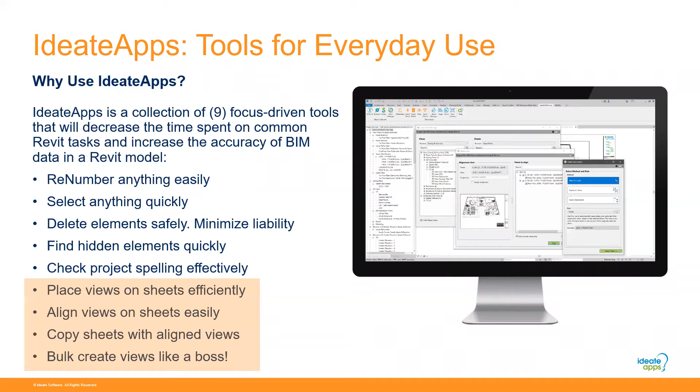So that's really what we're focusing on today, all the sheet and view tools of IdeateApps. As you see on the screen, IdeateApps has the renumber, smart delete, X-ray, and spell check, but it also contains the Ideate ViewCreator, Ideate SheetManager, Ideate Align, and Ideate Clone. I'm going to go through each one and show you the workflow that can really enhance your Revit productivity.

Ideate ViewCreator is the first tool I'm going to talk about today. ViewCreator allows you to create new views based on a series of rules. Those new views could be dependent views, as an example, and it's one of the first examples I'll show you. It could also be a new view based on a different scale, a different phase, or a different discipline. Really, with any particular view properties, you can set that up, and then you can have the rule actually help you name that new view.

So we're going to set up some new views first. Then I'm going to show you how Sheet Manager allows you to lay out those views on the sheets. You can drag and drop views from the left-hand side, where the views dialog is showing you, and then on the right-hand side is sheets. So you can just drag and drop. There's a lot of other tools where I can cut and paste and move viewports from one sheet to another very easily.

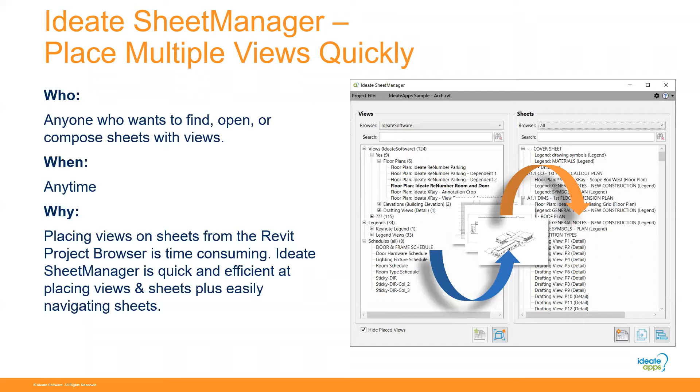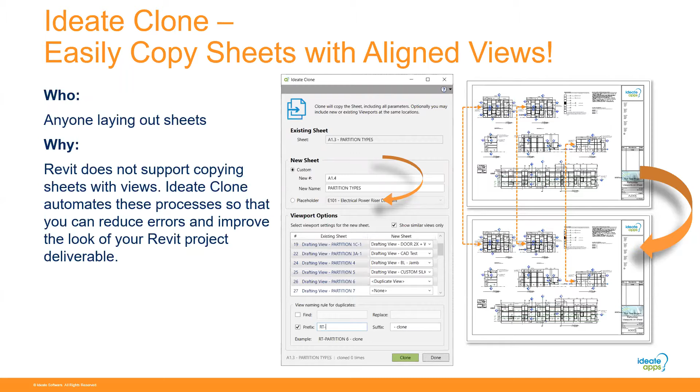Our Ideate Clone allows you to copy sheets because, as I mentioned, in Revit that's just not available. In fact, it's one of the top wish list items if you go to the Revit Ideas forum, to say, can I copy an existing sheet? Right now it's just not supported. So this gives you the tools to copy the sheet, the title block, any 2D information or annotation on that, but also be able to control the viewports. Do you want to copy the viewport, or would you like to swap one viewport, like one schedule to a different schedule? So we'll go through that example as well.

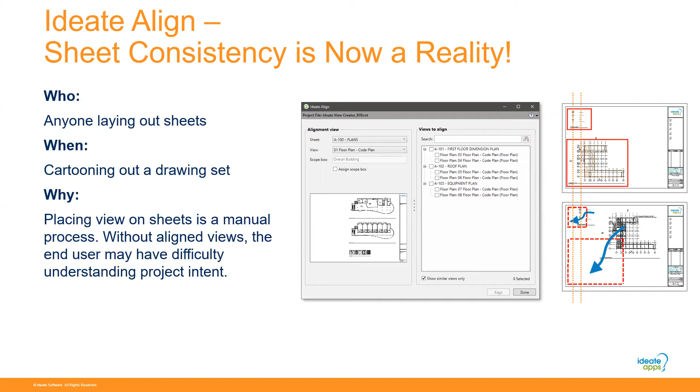And then our Ideate Align is about keeping those viewports aligned across multiple sheets, all automatically. So whether it's a schedule view or a plan view, you're going to be able to keep those things aligned. Well, I guess it wants me to go right to the demonstration.

So I got that set up. Let's switch over here. Today I am showing Revit 2021, because I thought that most people are probably using Revit 2020 or 2021 in their daily productivity or daily project work.

If you're not familiar with Ideate software, once you install any one of our applications, you'll see there'll be an Ideate software ribbon panel. I'm going to select Ideate software, and you'll see all the tools are available. Like I said, we developed four other applications, the Style Manager, Sticky, Explorer, and BIMLink. But here, starting with Renumber and all the way to the right, are the tools for IdeateApps.

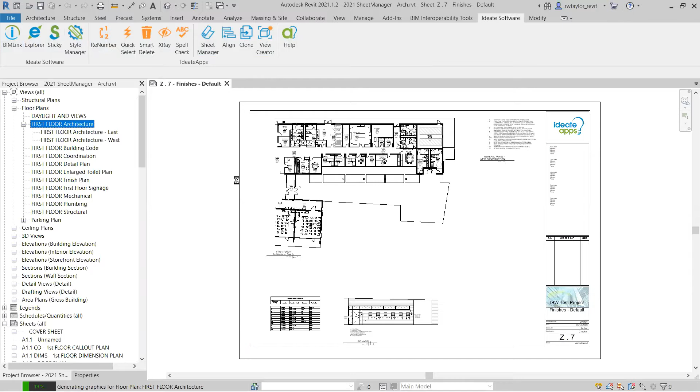As I mentioned, we're going to start with ViewCreator. You look over here to the project browser, right? I have a floor plan, first floor architecture. If I double click on that, you can see this is the overall plan, right? But what I've done is I've used crop regions basically, and I've selected an east view as well as a west view, and I've set that up. So those are dependent views underneath the main architecture floor plan.

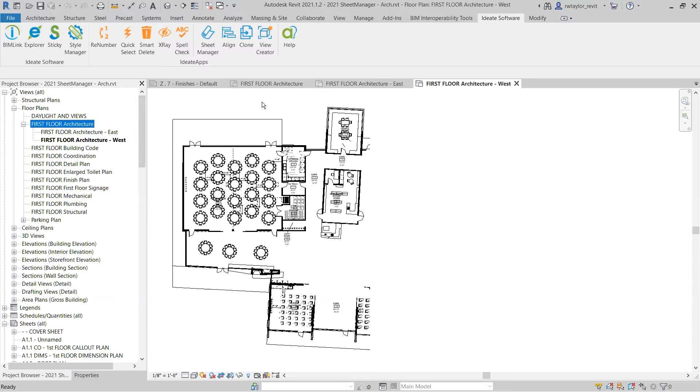What if I wanted to create those dependent views with the same crop regions and the same properties for other floor plans? Well, that's one of the uses where Ideate ViewCreator can come in. So I'm going to close these two, the east and the west view, and we're going to come over here now to ViewCreator. When ViewCreator starts up, it allows me to select different methods, right? I'm going to show you another one, the duplicate view method, in a moment. But right now we're going to apply dependents.

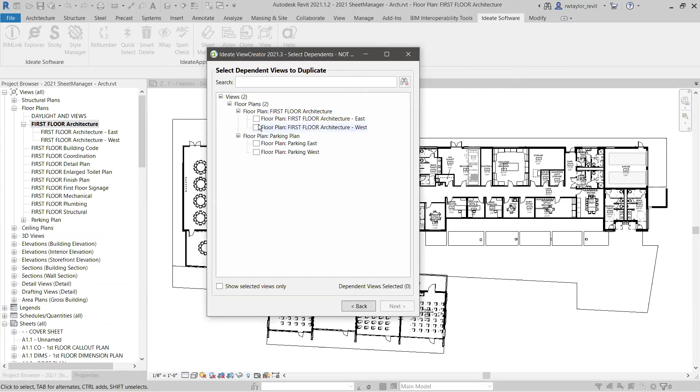So I'm going to select the views to start out with, right? In this case, I've got a parking plan that has some dependent views, but I've also got that first floor, east and west. So I'm going to select those two, the east and the west floor plan, and I'm going to say next. Then I would say, well, what do I want to apply that to, right? I would like to apply it, and I'm going to select architecture just to show you what that's going to do here, because I'm actually selecting the same plan.

I'd like it to be on the coordination plan, on first floor signage, mechanical, plumbing, and structural. So I'm choosing those that I want to have ViewCreator apply those dependent views. I'm going to say next.

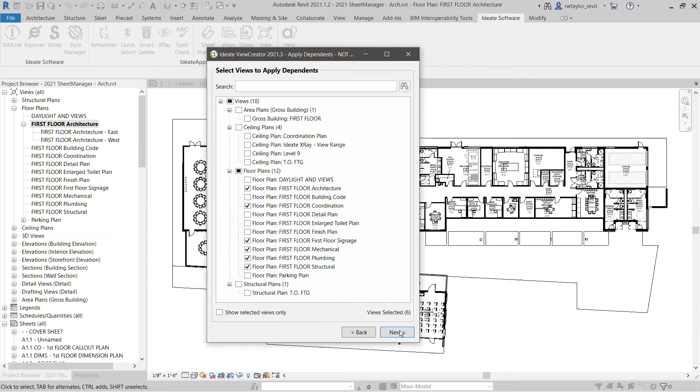Based on that rule, it's going to give me a preview of the view and the naming convention. And we're going to see that I get an error here in a moment. It says create 12 views, but I can't click on this until I solve this error.

The reason it's giving me this error is because I selected the first floor architecture and I'm trying to apply the same east and west, and it's already there. It's telling me these two are there, so it's either saying change the view name or do something else. But I can do a shift select on this, say delete, and now I have the ability to create those 10 views.

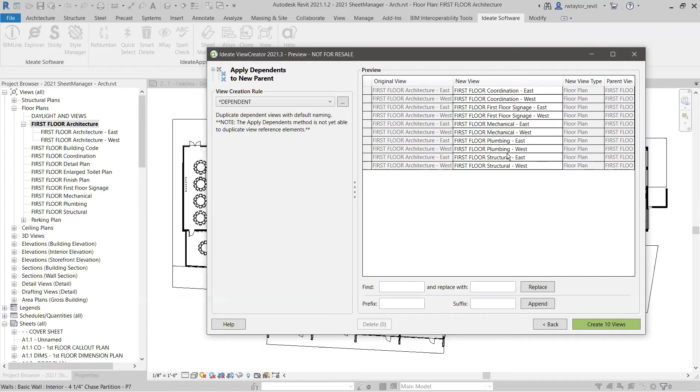If I expand this a little bit, I have the ability to change the view name here. I can type anything I want basically, but the rule allowed me to keep the same east-west dependent view selection. So I'm going to go ahead and create those 10 views.

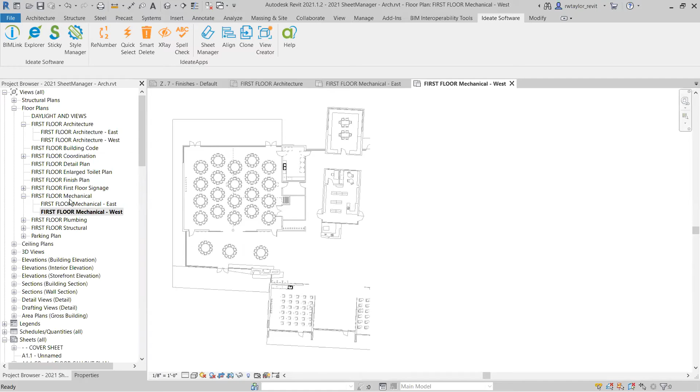And it says okay, you did it, you're done. Now over in the project browser, if I go to the mechanical, I have dependent views east and west. And it has the same crop regions, but we've applied the information based on the parent view, which was this mechanical. If I double click here, this is the mechanical plan.

So that was just one method of using ViewCreator. Now we want to come over here to our sheet manager. And I like to think of sheet manager as sort of the

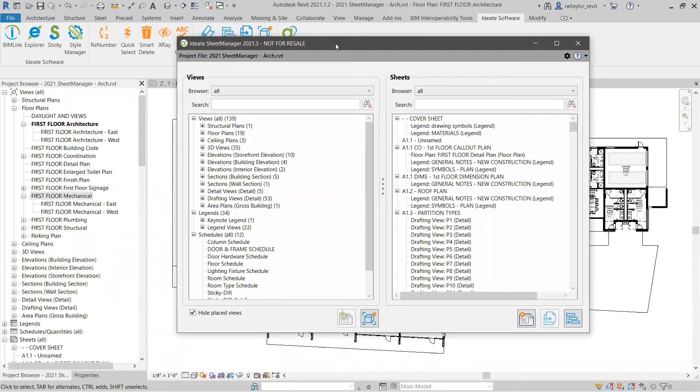centralized traffic cop, if you will, if there is such a thing anymore, where they're basically routing the information, routing the cars or trucks to the right individuals, or the right locations, I should say. And so the sheet manager allows me to access all the views, all the sheets, and allows me to create new views and drag and drop views on the sheet.

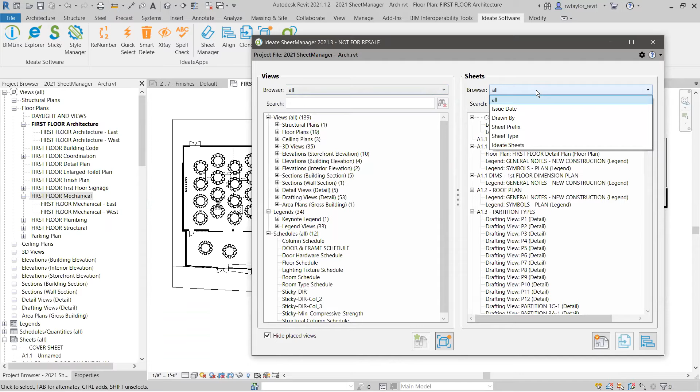You'll notice that right now I can look at the browser organization here. Anything that I've already set up, I can select, or I can just say all views. The same way with the sheets, I can look at the browser organization and just say, well, I want to look at all sheets as an example.

So in this case, let's create a new sheet. I'm just going to accept my defaults. And if I look at the bottom here, as it selects, my last sheet was in the Z's, so it just said okay, that's the next in the list.

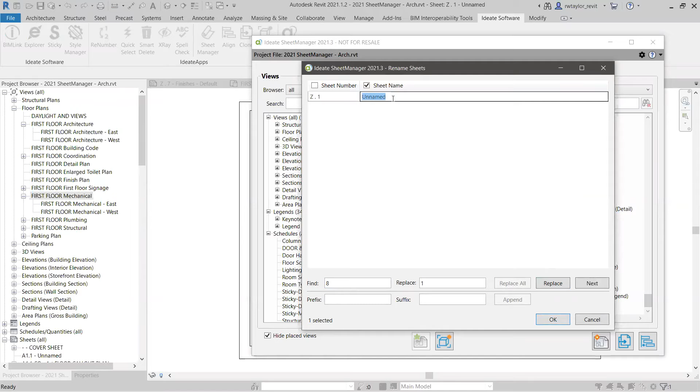But in fact, I want to right click and rename that. In this case it's a pretty simple situation, I just want to change it to maybe like Z.1, but I wanted to show you the tools here, as I can ask Sheet Manager to find 8 and replace it with 1, and replace. So now the sheet number is going to be called Z.1, and the name I'm going to call it coordination.

So the reason I did that was just so that we could see it here up in our list. Right now we have the sheet, and there are no views associated with it.

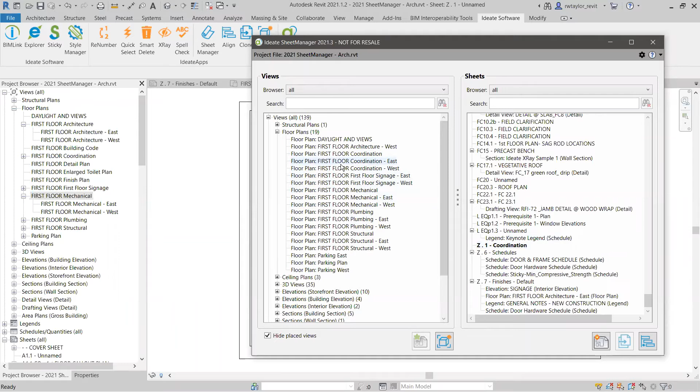So remember, we created with our ViewCreator, if I come over here to floor plans, we now have a number of new floor plans. One of those is the coordination east and west. So I'm going to select the coordination west, click and drag and drop it over to Z.1. That assigns the floor plan to that sheet which I called Z.1.

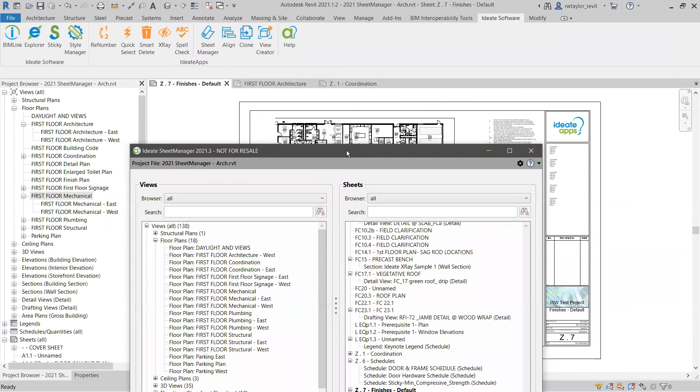Now if we look over here in the background, there's our finishes. Notice that if I zoom up on this, this is a signage elevation. And maybe I want that signage elevation, I want to remove it from Z.7 and bring it over to Z.1. So I'm just dragging and dropping. And because Revit only allows a view on one sheet, it automatically removes it from Z.7 finishes and puts it under Z.1.

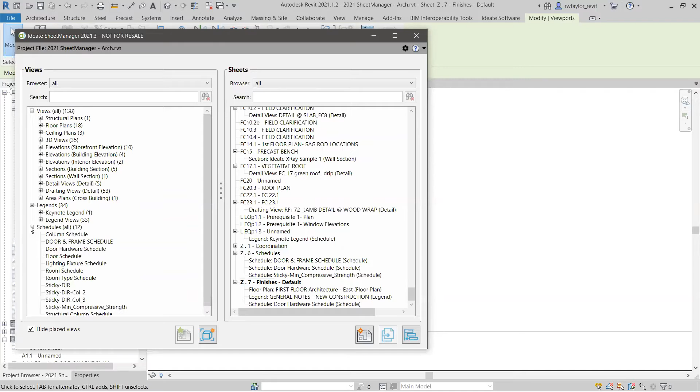Then I might want to place a schedule. So I'm going to come down here to schedules, and maybe say that I want a door hardware schedule also on that Z.1.

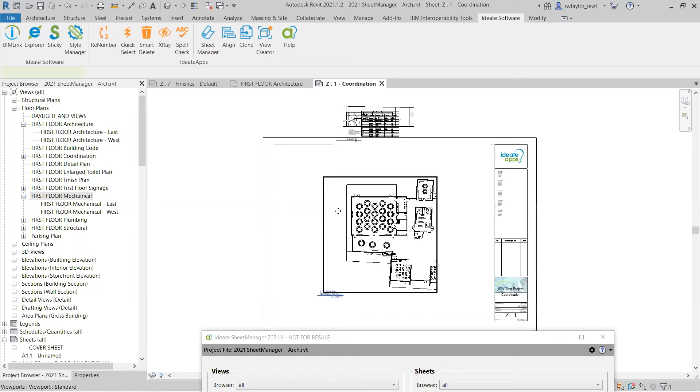If I expand that, you'll notice you can see the viewports assigned to that. Let's come back over here to Z.1 coordination, and then I can start to lay out those views where I want them. Because now that they've been assigned to the sheet, I can say I want the viewport in the upper left-hand corner, the schedule down in the lower right, and maybe this elevation in this location.

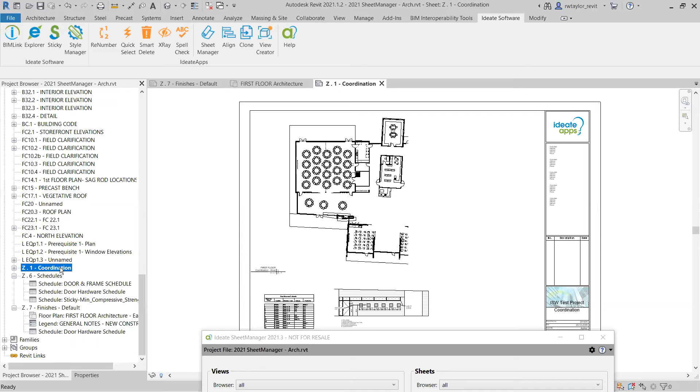So I basically laid out the plan, schedule, and elevation the way I want, and I would like to duplicate this. Over in the project browser, if we go to sheets, I go to coordination - this is what I'm on, and it shows me the active viewport. I'm going to right click and say duplicate, and it's all grayed out. Revit doesn't allow me to duplicate or copy a sheet, but we can do that now with our Ideate Clone.

So I can come over here to the coordination and select Clone. Here's where we're giving you the tools to control the viewports. It's going to be called Z.2, and it's going to be called structural, because I'm going to take this and make it the structural plan. So I'll say structural. And here is where I can swap the viewports.

Right now it's saying you've got first floor coordination west. Maybe I want first floor structural west. And then for the signage elevation, what I want is an overall building elevation, not an interior elevation. So I've got one created already - if I come down here, you can see I've got west elevation for structure.

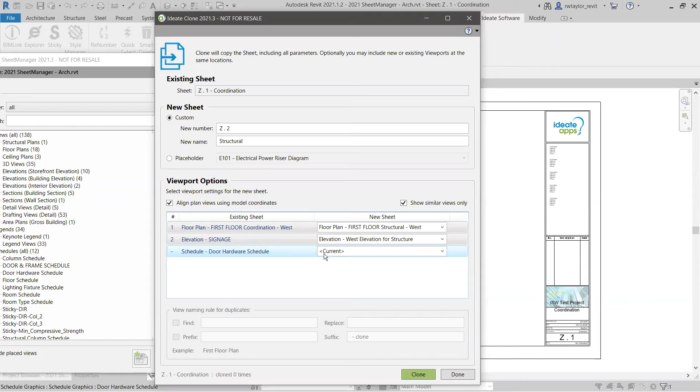A schedule can actually be on multiple sheets. So if I say current, it's just going to copy the door hardware schedule and display it on this sheet. But I'd like to swap that to a more structural type of schedule - I've got here this minimum compressive strength schedule. So if I'm duplicating views, I've got rules where I can duplicate the view and the name very easily, but in this case I just swapped all three viewports to these three new viewports.

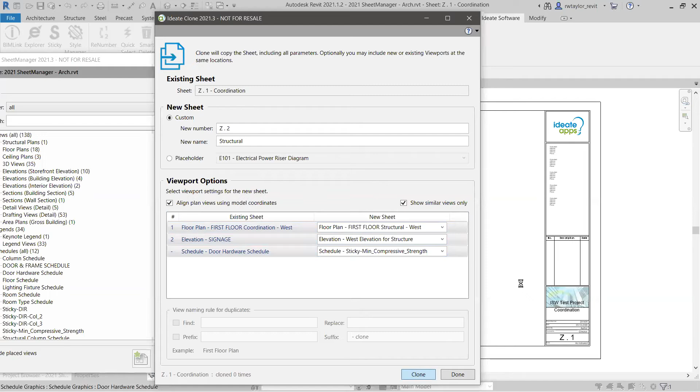Now when I hit clone, it's going to copy the sheet, the title block, and any 2D information on that sheet - in this particular case there really wasn't any 2D annotation. But it's going to keep everything aligned in the correct location. So now when I select done and look at this, here's our original Z.1 coordination, and here's our next one, Z.2 structural, and you'll see that the floor plans are aligned.

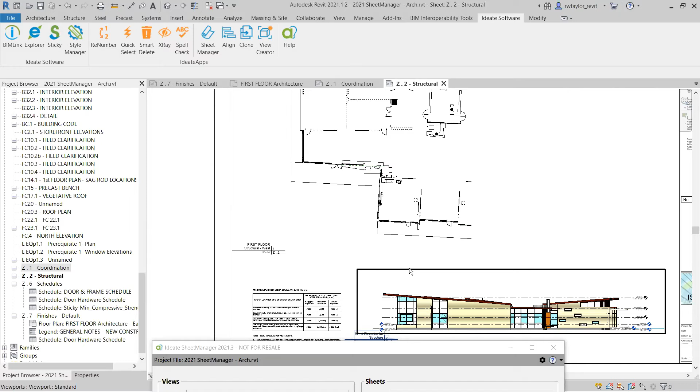The schedules, elevations, and detail views will be aligned by the upper left crop region. Another thing I can do here - I realize that on this finishes sheet, if I fit this, there was a really nice legend here in the upper right-hand corner. So I'm going to come over to that finishes sheet and look at that legend, right click, and copy the legends. Then we're going to come over to that new structural sheet I just created, and paste the legends and schedules.

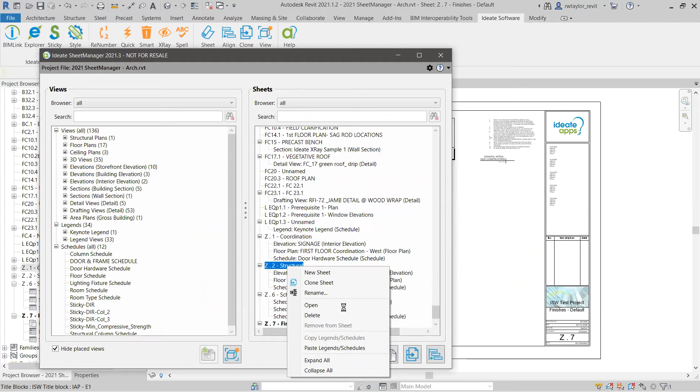So now, once I've done that, I can come over here to our Z.2 structural, and if I fit this view, you'll notice that we have the legend in the upper right-hand corner. So now I'm well on my way to constructing this nice sheet.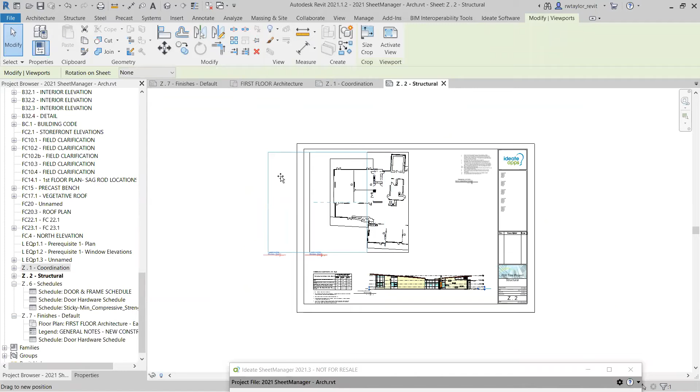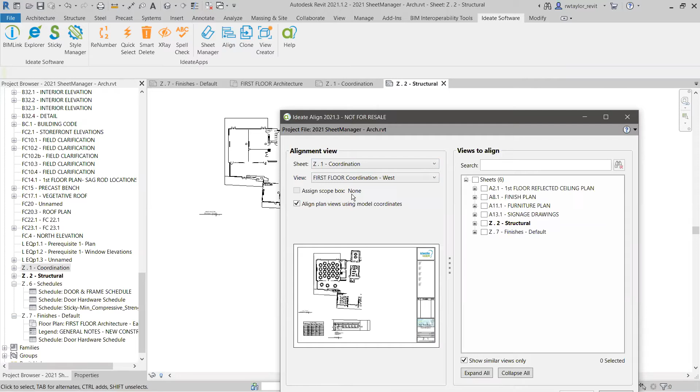So how did the alignment work? In this case, I'm going to take this floor plan and bring it off to the sheet here - basically not align it. I moved it by mistake, let's say, and now I want to align that. So I can come over here to align, and it asks what is your alignment view. I'm going to use the coordination, the first floor coordination west, and I want to align the first floor structural west, because that's what I moved off here, since I'm in the structural Z.2.

So I'm basically saying that's what I want to align to, and I hit align, and it pops right back into place. You'll notice I can also choose to assign a scope box - if it's not a crop region, I could align by that as well, which is a nice option here. So it's very, very easy to keep views aligned.

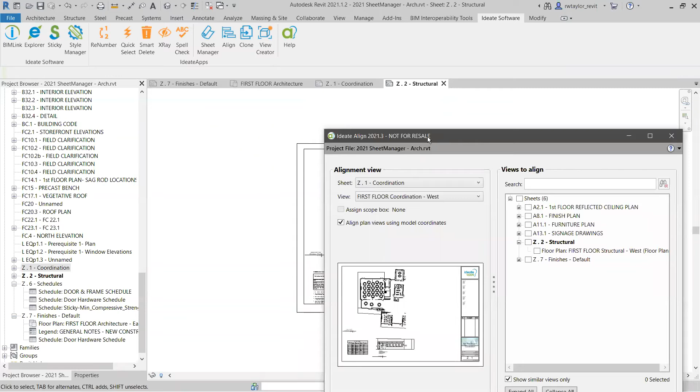I'm going to close this and switch over to the demonstration or the PowerPoint slides for a moment.

I want to show you this video because it shows a better sample with multiple floors. It's the hospital sample project that Autodesk has, which you may be familiar with. What I'm doing is assigning a scope box and choosing multiple floors to align to.

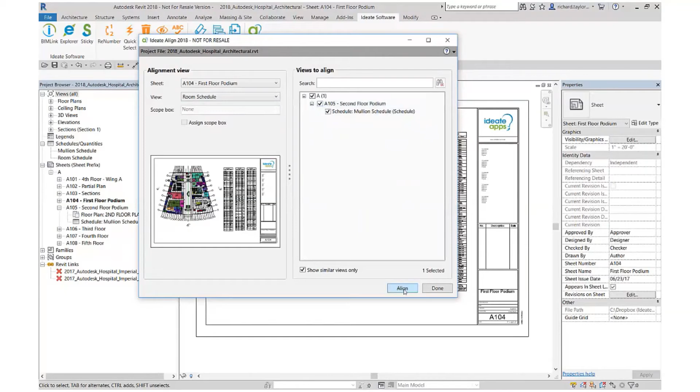So I have the first floor plan, and I want to align the second, third, fourth, and fifth floors, and also align the schedules across multiple floor plans. Notice I'm opening those up, double clicking, and tiling the views, and you can see they're all aligned based on the model coordinates. That's really nice—you can do multiple levels at once.

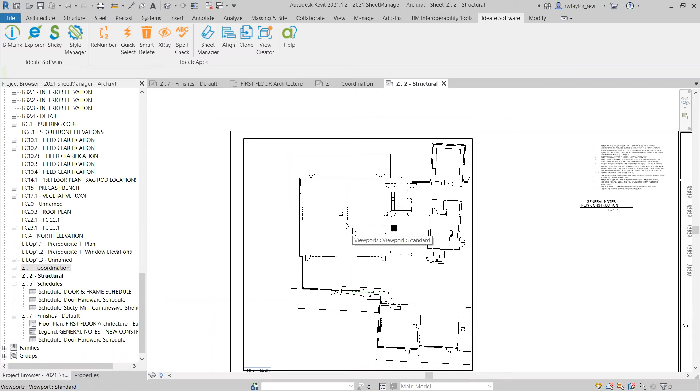I mentioned you can align based on model coordinates. We've added a new feature coming in our 2022 and subsequent releases, not just 2022 but our latest release in a few weeks. We've added the ability to align plan views not only by model coordinates but by the centroid of the viewport. So if you have unit plans, apartment, or condo plans on a sheet, it's easier to align them by the centroid of the view rather than the actual model coordinates, since aligning by model coordinates may put them completely off the sheet. That was a request from one of our customers, so we made that enhancement.

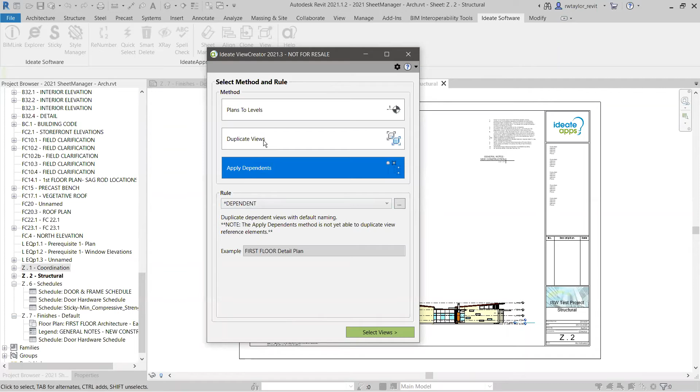I also wanted to show you some other things you can do with ViewCreator. If I go back here to ViewCreator, let's bring this up and show you some of the rules. You saw me apply dependents the first time, creating new dependent views. But now my task is to duplicate some views in a different phase.

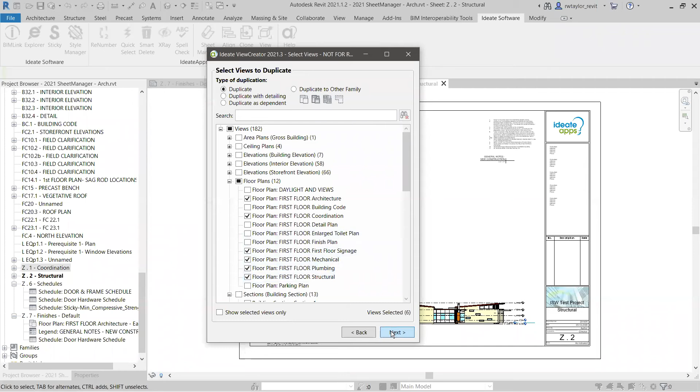So here I'm going to look at the plan and bring in all these elevations. Here's our floor plan, and remember we have architecture, coordination, first floor signage, mechanical, plumbing, and structural. I say okay, next, and it asks what rule I want to apply.

In this case it's already got a name called copy, so I'm going to apply a rule called duplicate phase. Here I have the ability to apply a phase filter and a phase. I can say this is new construction, with the phase filter set to show previous and new, and the phase set to new construction—typing that in. You can see up here the actual name of the view reflects what I entered.

Now let's say I want to put a dash there to make it easier. But instead of a name override, maybe you want the name to pull information directly from the model, from parameters you've already set up. So how do we do that? I'm going to go over here to the rule.

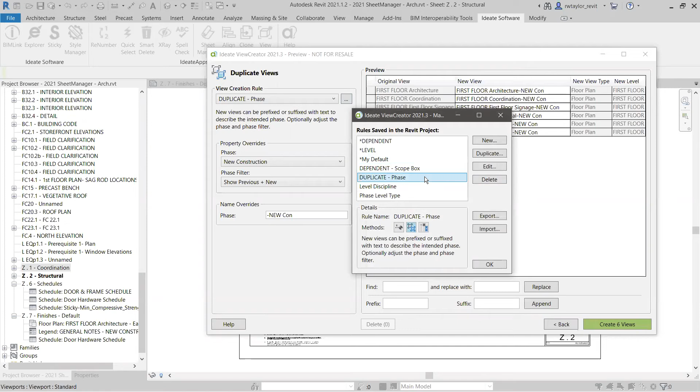I'm going to show you a bit of the secret sauce behind this. You'll notice there's the name of the view, and it says here's the phase. What I want to do is select that—there's a constant here—and I'm going to remove it.

So now I want to add a field, and we'll come over here and go to phase name from our new view. Let me find it—type level phase, there it is, phase name. I say OK, and notice it now says first floor, detailed plan, new construction.

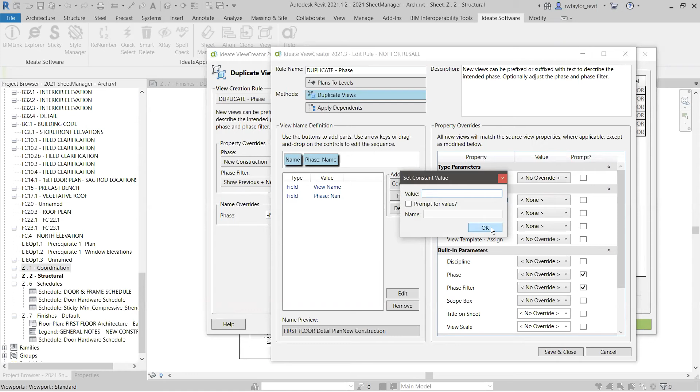I'm going to add a constant, just a dash, building this into the formula so I don't have to input it later. Now I can move the pieces of the formula around so it has the name of the view, the dash, and the phase name. You can also see things the user can interact with, like the phase filter, or if I wanted them to choose the discipline, I could do that as well.

Sometimes the discipline and other things are set by the view template if I do assign a view template. So I have to make sure that I'm not overriding something, right? Maybe I'm assigning a view template as well as choosing something that is not within the view template, like a phase or phase filter.

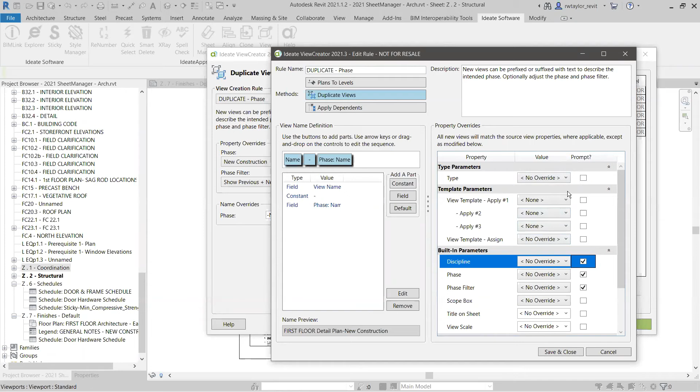Notice that I can apply several view templates, just like you can in Revit. You can go over here and say, apply design options as an example, then maybe phases, and then the actual view template is going to be mechanical or architecture. So you've got those abilities as well. When I save and close this rule, it's a pretty simple rule.

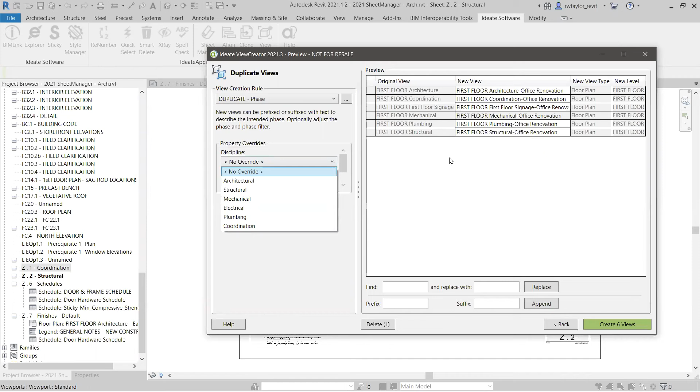What I like to show here is that if I go over here in office renovation, notice automatically the view name changes to office renovation. If I say no, it's existing, it changes. No, it's really the office renovation, it changes. And I can say the phase filter is going to be show previous and new, or demo. We'll say previous and new, that kind of makes sense. And if there's any discipline, in this case since we've got multiple disciplines here, I don't want to assign a discipline, but you see I can actually override the discipline as well.

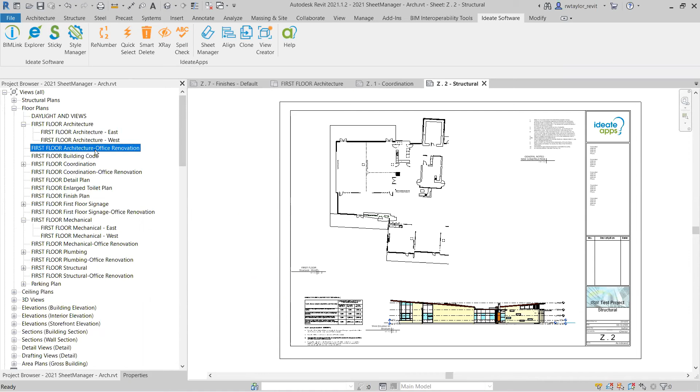So I'm going to go ahead and create those six views. Now I'm going to come over here to my views, my floor plans, and notice that I now have those. If I scroll over here, now I have the architecture office renovation, and then I also have the mechanical office renovation. So I have those views that I've created that now have different view properties.

You'll also notice if I go down here to the phase, the filter was already set to show previous and new, and the phase is office renovation. So you can create hundreds of new views with all of the view properties that you want. Instead of copying a view and then going back and changing all the properties, you can set up all these properties beforehand and also help you name the views as you go forward.

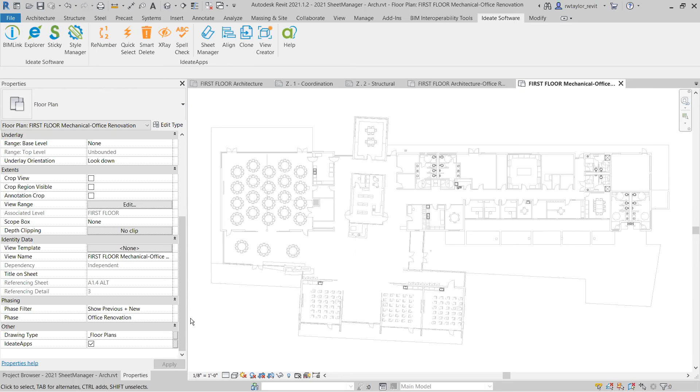So let's go over here to the ViewCreator. Basically we're giving you basic rules as well as bonus rules, and those are stored. We've got about 20 or 30 basic rules that you can load, delivered with the software, and then another 20 or 30 bonus rules that you can also use.

Now, some creative workflows: you can do ViewCreator, use SheetManager to create new sheets. I can even use our tool called Ideate BIM Link to create sheets from Excel that can then be used in Ideate SheetManager. And then, as you saw, I can put them all together, use Clone Align to arrange design options, phase, discipline, different views on sheets with the exact alignments or arrangement between sheets.

So a couple tips: as I said, when you're aligning plan views, it's going to align by the model coordinate. With our new selection, you also have the ability to align by the centroid of the view. For non-plan views like elevations, sections, schedules, detail views, it is going to align by the upper left crop region.

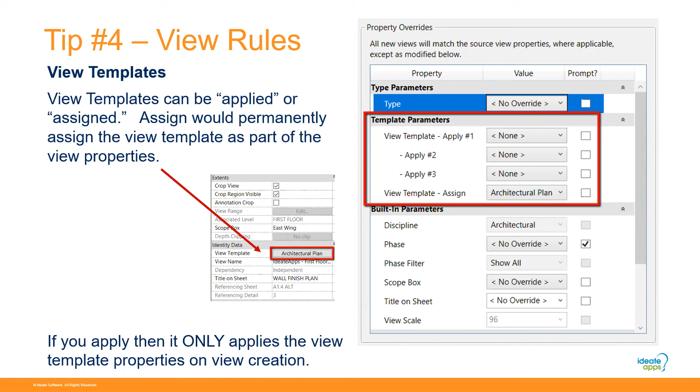I wanted to note that we have many videos available on our website. If you go to IdeateSoftware.com and look under our support video library, you can see we have specific videos around sheets and views, and you can look at a playlist. In fact, I'll go over there right now.

I'm going to bring up our Ideate software video library for IdeateApps. Once that page displays, I can choose a playlist, and you can see here, IdeateApps for sheet and view management. That will give me just the videos about view and sheet management.

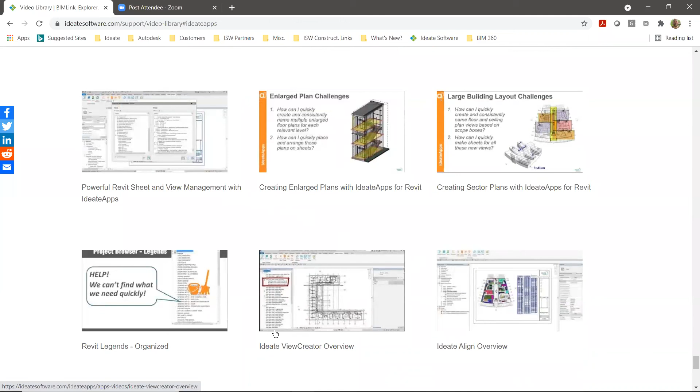So you see here, being able to batch rename views, copy legends and schedules, and create new sheets from unplaced viewports. Basically several webinars we've done that have a bit longer content, but also shorter content like a quick ViewCreator overview, an Ideate Align overview, and so forth.

These are really nice if you want to learn a little bit more about the IdeateApps sheet and view tools. You can come to our website and look at those videos. Like I said, they range from just a couple minutes to a longer 30-minute webinar like what you're watching today.